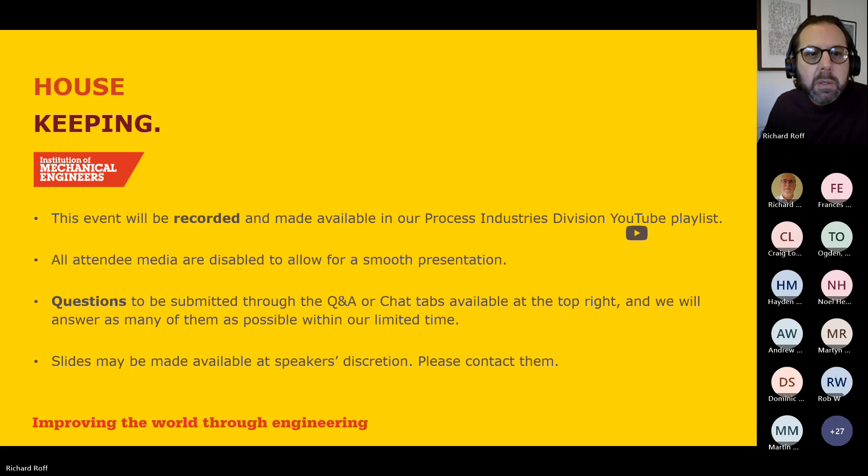About this session, about this webinar, this is the final event in a series of webinars that we'd called Steal with Pride, which isn't terribly snappy, but does seem to describe what we've been talking about. We hope today to provide a little bit more information in terms of particular subjects, and those subjects are around human factors, human reliability, and ethics, and also to summarize the sessions we've had so far.

So the agenda for today, this morning and into the early afternoon: I'm going to look back first over the Steal with Pride series of webinars that we've been running since 2021. We'll then have a session from people with expertise in human reliability and safety critical settings, around some techniques to reduce human error in high significance activities, with some practical applications.

We then need your input, because we have some case studies to look at and some discussions to have around the ethics of decisions versus safety and environmental protection, with respect to how engineers make decisions.

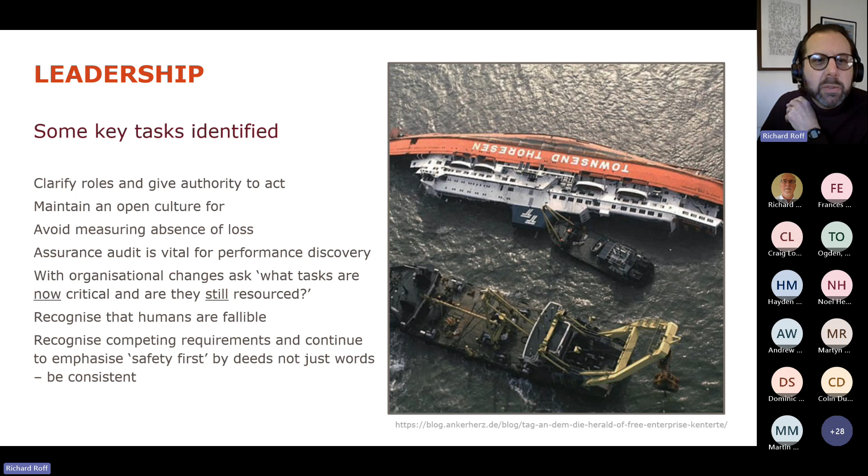Okay, so we need to define critical tasks, preferably what must go right, the barriers, what has to be in place within your procedures. And if we focus on what has to go right, we can then ask, do we have enough suitably qualified and experienced people to deliver that? And do we know that they know what has to go right?

Certain organizations have to manage a lot of change in organization and organizational content and makeup quite routinely, and most of their time then is spent reiterating, here's how we do things around here. If you work in a relatively consistent organization, you may not have to do that reiteration so much, but auditing can find out whether we're sliding away from where we want to be.

So we're trying to ask ourselves the question, do we understand what could go wrong? Do we know what systems we have in place to prevent that happening? And do we have information to assure us that that's happening? So you may recognize those questions.

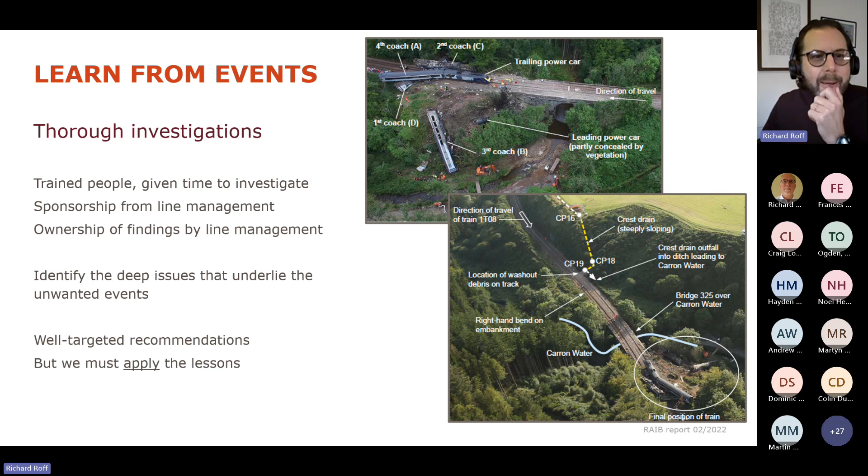When looking at data, we focused on a number of incidents. We focused on a number of aspects of data. So there's my three questions again: What can go wrong? What must go right? How will we know? But it is important that leaders see, discuss, and actually engage with information.

And that information needs to focus on the barriers. So what are we doing to make sure that incidents don't occur? It can give advance warning of degradation in barriers. Potentially, if we're measuring a leading indicator about the state of a barrier, if we know that it's beginning to degrade, we can fix it before there's actually any kind of loss or harm.

The other feature that looking at data can do, especially if you look at a suite of indicators, is allow for weak signals to be identified. Weak signals in those data might mean a particular part of the organization suffering a number of dips at once, or a particular subject suffering a number of dips across the whole organization. And these things can allow a strong response before even minor incidents occur.

But try to pick leading indicators, indicators that tell you something about barrier performance, which will give you and your management teams opportunity and time to respond. There is an important point that data can be difficult to engage with, particularly for people who are short of time. So it may well be that we need specialists to interpret that data, but it is the organization's data, not the specialist's data. It's kind of important that the data become information, and that the information is then used to make good decisions by management teams.

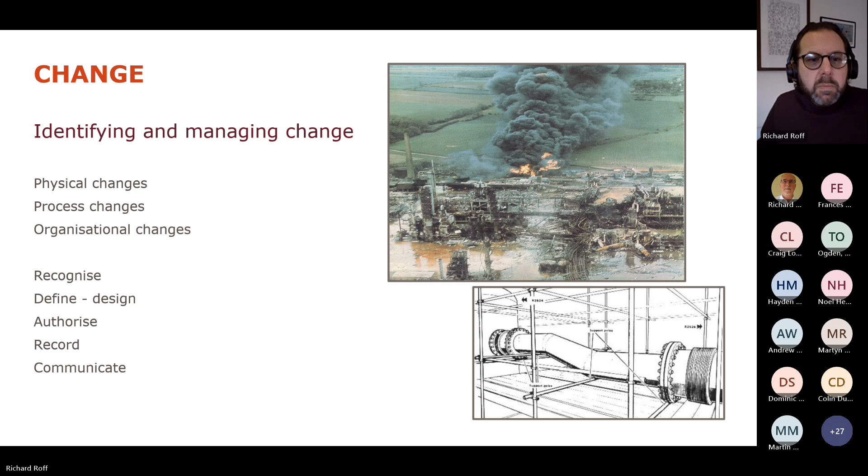Okay, well, one of the other presenters today, who you'll speak to in a moment, focused me back towards Trevor Kletz, and Trevor Kletz is a process safety guru, certainly from the chemical industry, and often people choose quotes from some of the things that Trevor has said, reputed to say, often said.

One of the ones I particularly like is one that I do use with managers in the organizations I work with. So after an accident, managers will often say, I did not know this was happening. If I had known, I would have stopped it. And Trevor then usually says, it's bad management. It's the manager's job to know what's going on. And he says it with total amazement. And actually, I think he's right. And I agree with this one.

And it's particularly important for you if you are advising or working with managers. If managers say, well, I don't know what's going on, then there may be something about prioritizing their time that we might be able to help with. I think it's quite important that we don't set our managers and leaders up to have so much on that they can't possibly know what's happening. And when I talk about organizational change, that's one of the areas to think about.

I was involved in the production of our guidance on safety critical task analysis, and many of you might be familiar with that because it's become in some ways the de facto standard on safety critical task analysis, used in many parts of the world, from Brazil to Singapore, and everywhere in between. So let me just introduce myself and the Energy Institute. I've been with the Energy Institute for about 14 years now, and in that time I've managed the human factors committee, and all of the various guidance documents and other resources that we've produced. I'm not going to talk about all of those today. I'm going to talk about one of those, and that's around safety critical task analysis.

Let me just get the slide going. There we go. So just very briefly about the Energy Institute. If you're not aware, the Energy Institute is a professional membership body for the energy sector. So unlike IMechE, who are there to support mechanical engineers, we're here to support anyone really who's working in the energy sector, regardless of what their role is. Whether you're an accountant, could be an engineer, could be a petrochemical engineer, could be an energy manager, etc. The Energy Institute is the home for those types of people.

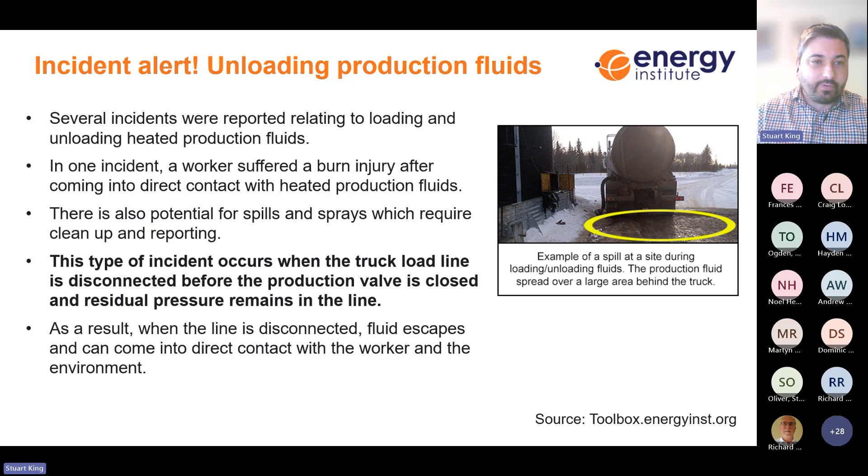But I don't think you can do that because there are safeguards. In this case, there aren't, and of course that means that when the line is disconnected, fluid escapes, and because it's heated fluid, it can come in direct contact with the worker, causing burns.

And the thing that can release that hazard from the tank is a task, or in this case, a business need, we could call it. So we have a need to load and unload production fluids to and from the tank.

Now, to manage that task, we have various steps. So we break that task down into, let's say, 5 steps in this case. We could visualize some of those as barriers. They might not all be barriers, but we could visualize them as barriers and complete our Swiss cheese model. And if all those steps are done correctly, the incident shouldn't happen. Very straightforward.

Now, we've documented that step-by-step process in a procedure. We've trained the workers to follow that process, that procedure, and we think, okay, great, job done. That's all that needs to happen.

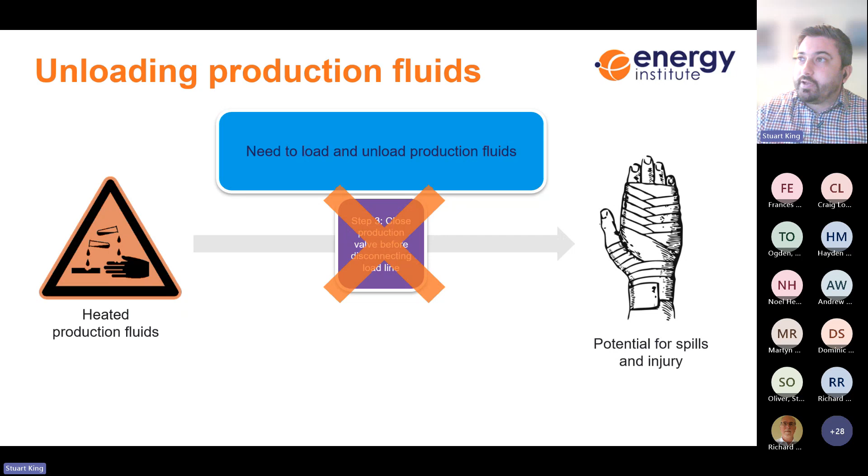And we know from experience, from the incident alert, that when that doesn't happen, the incident happens. The product spills, someone gets injured, someone gets burnt, or product leaks all over the floor.

Congratulations, you've just discovered a safety critical task. So what is a safety critical task?

A safety critical task is a task where human factors could cause or contribute to a major incident. It could also refer to a task where human factors could disrupt the mitigation of that incident. And so safety critical tasks can be operational tasks, emergency response tasks, control and mitigation tasks—it could be various different types of tasks.

The important thing is that a safety critical task is not just a task where someone can get hurt. And I know in the US this has caused some issues, or at least quite a long time ago when I was talking to people there. In many companies there's this consideration: oh, safety critical task, that's any task where someone can get hurt or injured—climbing up a ladder, anything like that. No, that's not it. Unless that person climbing up the ladder is holding the roof up or something, it's not a safety critical task.

So a safety critical task is where a human action can cause a major incident. That is what it is. It's not just where someone can get hurt, and that's why I think this diagram on the right is quite useful to visualize that.

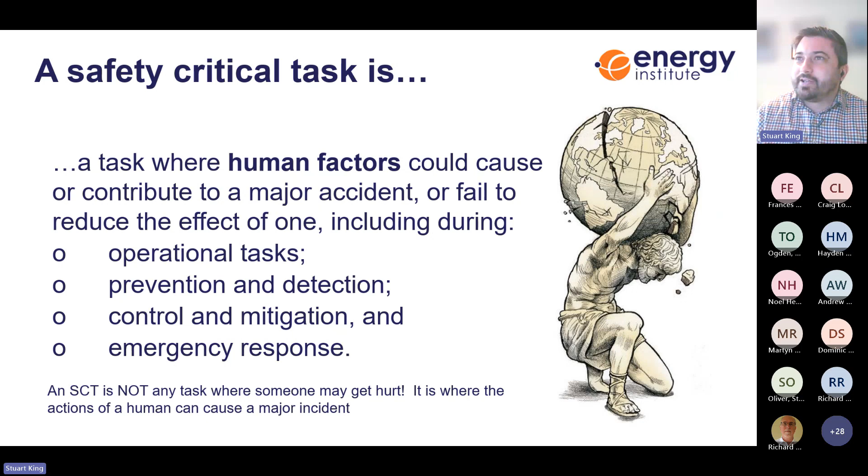So safety critical task analysis then is a qualitative assessment of a safety critical task. It's not a quantitative assessment. So if you do LOPA studies and things like that, we're not trying to give a probability of something going wrong. It's qualitative.

So what this really means is that it's all about breaking down a task. So we take a task that we think is safety critical, we break it down into subtasks or steps—it's the same thing. And then we want to understand, well, each of those steps, what human errors can occur? What would the consequences be of that human error? And what are the error traps that make that human error more likely?

So error traps is a term that some people like, some people don't. Others would call it performance influencing factors and things like that. But I think error traps kind of gets the point across quite nicely.

And of course, the whole point of safety critical task analysis is to recommend changes to remove the error or to reduce the error likelihood by removing the error traps, making the task inherently safer, and ultimately we want to reduce risk to as low as reasonably practical.

And importantly, safety critical task analysis is quite a major undertaking. There are simpler types of human factors analysis that can be done, which I will mention at the end, but safety critical task analysis is really equivalent to a HAZOP, so it's quite an undertaking, and therefore it only really needs to be done for the most serious process safety risks.

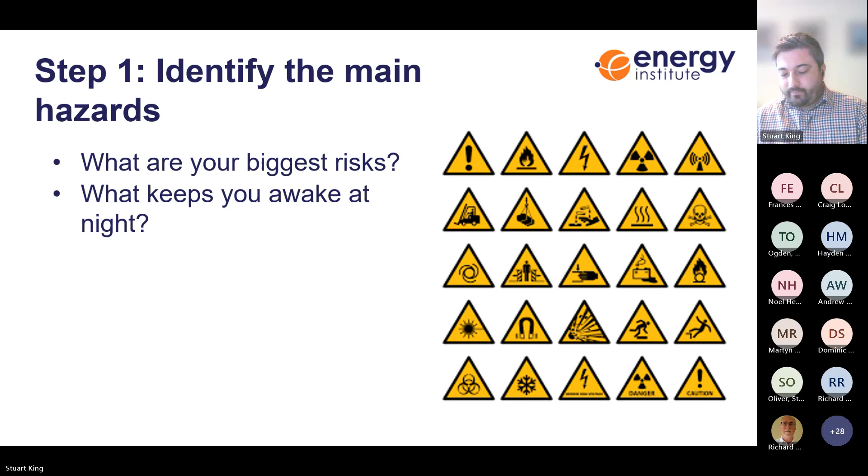Then step 2 is around prioritizing the safety critical tasks that you want to analyze. This is probably the main stage where companies struggle. A typical large site might have thousands and thousands of tasks that are undertaken, and not all of them need to have an SCTA done on them. So companies struggle to understand, well, which ones do I need to analyze, and which ones don't I need to analyze? That's usually the first major step that needs to take place.

There's a few ways that companies can prioritize the tasks they need to look at. Ultimately, they want to concentrate on only the most safety critical tasks. So how do we find that out?

Well, often it could be the subject of incidents in the past. So if you've got incident reports, it's quite possible that there may have been some example tasks in there that could be considered safety critical. That's one way of doing it.

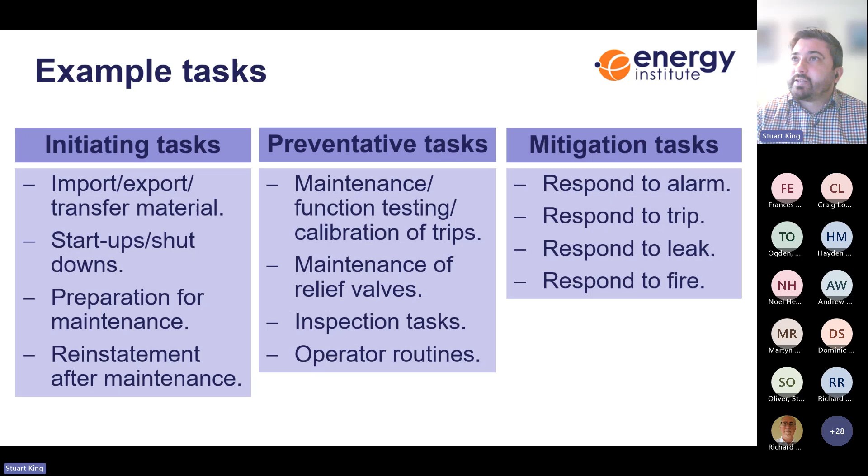Now, once you've prioritized your tasks, you have to pick one. You don't analyze them all at the same time, you analyze them one at a time. So we focus on one of the identified safety critical tasks, and now we really need to understand how the task is done.

To do this, we don't just look at the procedure, because the procedure tells us how work as imagined is done - it's how we imagine the job to be done. What we actually need to do is talk to the operators, carry out a talkthrough, as well as looking at the procedure, in order to understand really how the work is actually done.

Step 4 then is around describing the critical subtasks in that task. It's worth saying that a task, in this case, is a fairly high level description of a whole series of activities that need to go on. So, for example, if you've got a procedure on carrying something out, the procedure is probably the task, and the different steps in the procedure would be considered the subtasks.

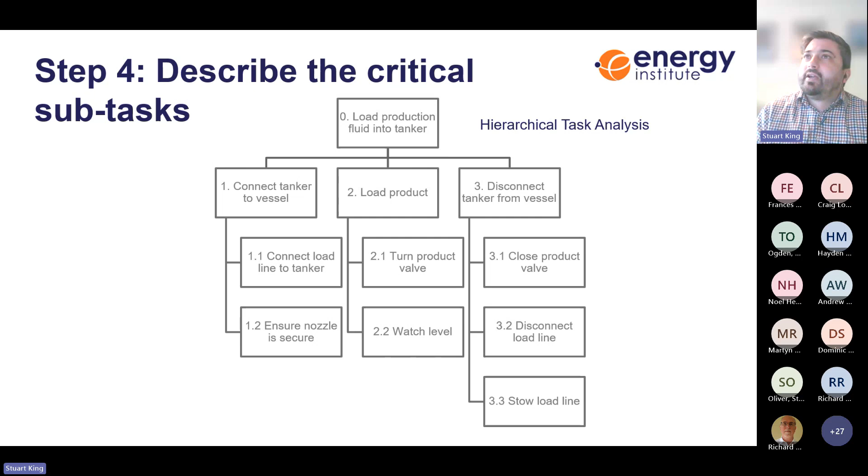Okay, so once we're happy that we've got a fairly accurate and useful picture of the task, step 5 is all about identifying what can go wrong and what could make it go wrong. So we're identifying potential errors and error traps, or performance influencing factors, PIFs for short.

So if we take a look at subtask 3, disconnect the tanker from the vessel, that's a subtask that we know has gone wrong in the past, because we've got the incident alert to prove that. So we look at this. Whilst we would obviously look at all of these tasks, just for illustrative purposes, we're going to look at step 3 here, disconnect the tanker from the vessel.

You can see that we've got three subtasks there: close the product valve, disconnect the load line, and then stow the load line. So what errors could be made during this subtask? This isn't necessarily the only way to do it, but it's the main way that is used. For each of those steps, we can apply a series of keywords.

So it's just like doing a HAZOP in many ways. In fact, we often call it a human HAZOP. You can see there we've got action errors, checking errors, information retrieval errors, selection errors, etc. So different types of errors.

And then we can look at them one by one and say, well, could this operation be done? Could it take too long? Could it be done too quickly? Could the operation be mistimed? Can an operation be omitted? And you can see there that it doesn't only apply to actions.

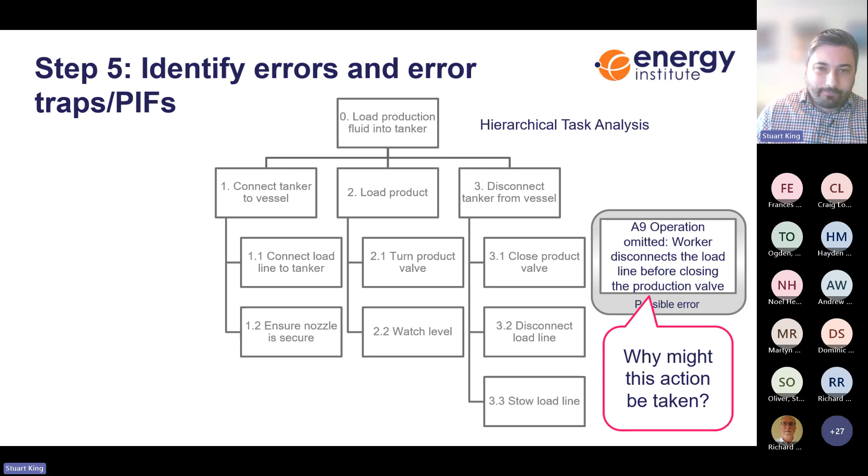Okay, so now that we've done that, we need to identify why this error might take place. In an ideal world, this sort of error shouldn't be possible, of course, but of course it is. So why is that likely?

So to do that, this is where we need to consider error traps, or performance influencing factors. When you look here, this is just a list of potential error traps. I don't believe this exists in the safety critical task guidance as such, but there are many different frameworks that can be used to consider different types of error traps. Often a good way of doing it is to break things down into error traps to do with the job, the person, the organization, or sometimes the task as well.

So if we look at this, what might make this particular error more likely? For example, if it's a very routine job, which I suspect in this case it probably is, those sorts of tasks tend to be done without thinking. Operators just do them. It's a bit like driving a car. We are fallible, and in those routine tasks we sometimes do things in the wrong order, miss things out. So that could be a potential error trap, because this is highly routine.

Time available or time required. If there are time pressures on the operators, which again I suspect there are, perhaps there are bonuses for doing all the deliveries to time, or maybe there are other time pressures as well. That can of course make people either rush, take shortcuts deliberately, or make mistakes.

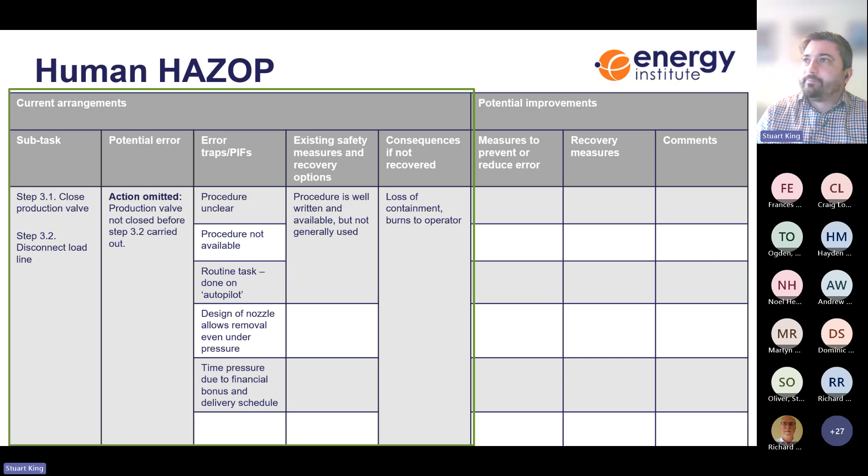Now, step 6 then is, so once we've identified all the different errors and error traps, we need to think, well, what are we going to do about that? What can we improve? So on the right hand side, we have the potential improvements. We have ways to reduce the errors, or remove the error traps, or reduce the errors. We have additional recovery measures that we could put in place. And what we probably should do is, for every task and every type of error that we identify, consider using some sort of hierarchy of risk management in order to try to address each of those. As I said, it's just done very systematically.

Remove - can the hazard be removed? Automate - can the human contribution be removed by automating the system? Mitigation - can the consequences of human failure be prevented? Bar is essentially, can the human performance be assured by mechanical or electrical means.

So in this case, for example, if it was impossible to remove the nozzle from the truck or from the tanker whilst it was under pressure, then of course that would probably solve the incident - barring...

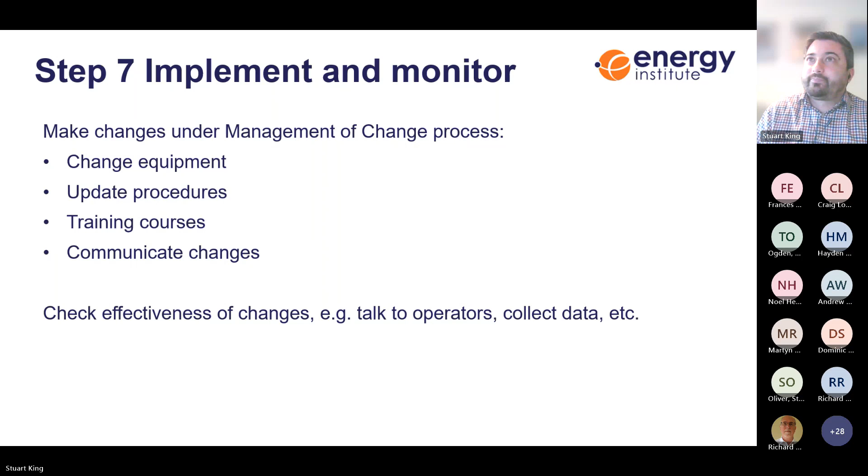It typically takes 1 to 3 days to analyze a single task, so these things tend to be done in big batches lasting a few weeks or longer at a time. And it takes about 5 days to be trained up in the methodology, effectively. So it is a major undertaking, and of course it's for the most major accident hazards.

It's one of those things that is worth doing and worth doing well, but it does take a long time. However, the principle of understanding what errors can be made, understanding what traps exist, and trying to do something about those error traps can actually be integrated into other types of risk assessment much further down the line, much closer to the front line.

And that's actually the focus of a current project that we're developing in the Energy Institute at the moment. But the general process of identifying error traps can be integrated right at the front line if you want - carrying out a 10-minute observation of the workplace to see what error traps are present, or integrating it into job safety analysis or the permit to work process as well.

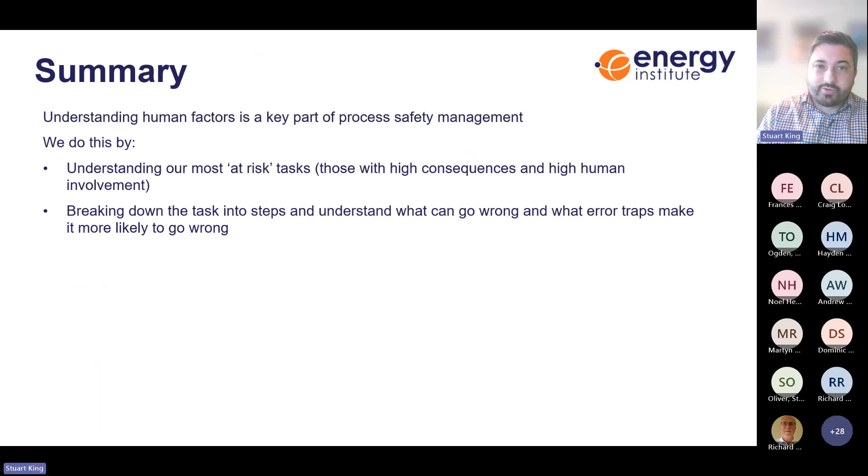So, in summary, understanding human factors is a key part of process safety management. One way to do this is understanding our most at-risk tasks, which in this case are those with high consequences and high human factors involvement.

We break down the task into steps to understand what can go wrong, and what error traps will make it more likely to go wrong. We implement changes to the task or the work environment to either remove the hazard, remove the human, support human performance by removing the error traps, or reduce the consequences to make recovery easier.

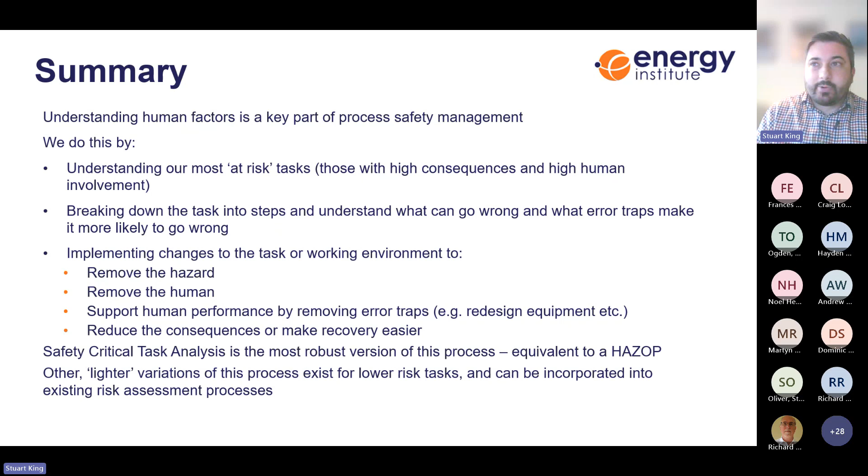As I said, safety critical task analysis is probably the most robust way to do this, but it is a major undertaking, and there are lighter ways to do it as well for less critical tasks.

What's the benefit for COMAH sites in the UK? Carrying out safety critical task analysis meets the HSE's expectations.

But more broadly than that, there should be a reduction in risk, avoidance of major incidents, and we're talking about company-ending incidents, as well as obviously life-ending incidents and major damage to equipment. These are potentially ruinous to an organisation.

Okay, so that's me. Richard, I've got your slides. Do we still have time for you? I realise I went a bit over time there. That's fine, thanks Stuart. I'll actually share my screen if you don't mind. Yeah, no problem, because I've made a couple of tweaks.

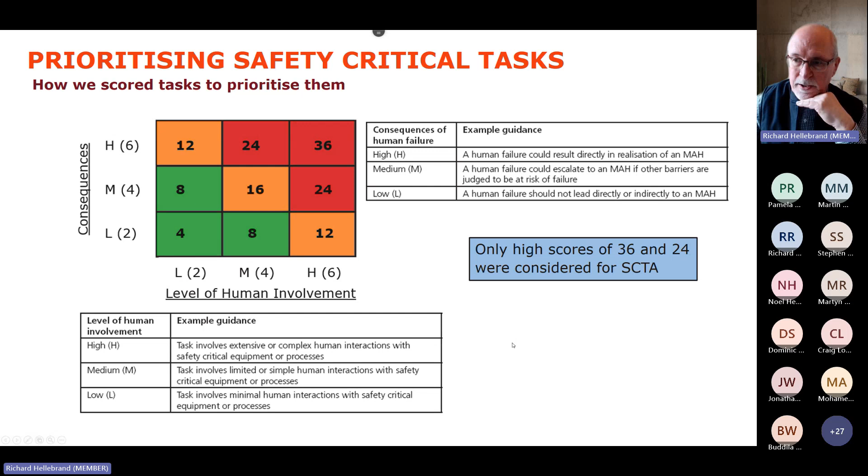275 tasks were checked, scored by the operators, not by the managers. So we got one or two good, experienced operators and technicians, sat them down and said, well, what jobs do you do? Not just the ones written down in our operating manuals, because that's what we envision being done, but what's actually done. Just tell us the title, even if you haven't got a procedure for it - what do you do?

So we listed them all, and they scored the amount of human involvement and the potential. Just to give a bit of a clue on this, VCM is vinyl chloride monomer, very, very flammable - it's a bit like LPG, but it's also a carcinogen, so you'll see it throughout.

I'm not going through all of these here, but I thought it's interesting, because we might have a diverse audience, to pick up on one thing that's perhaps common across all industries - responding to alarms. So it's not opening and shutting valves or disconnecting something, it's just responding to alarms. I'm going to pick up the SCTA just on this one example.

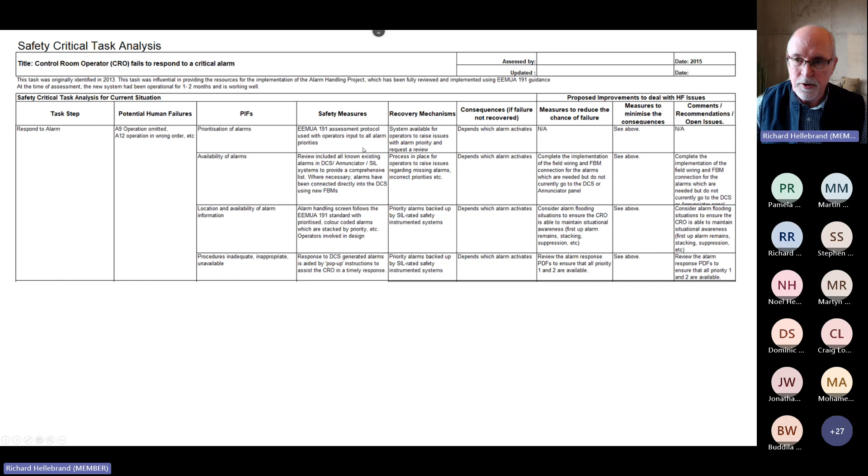So it's important to prioritize the alarms, and you have this thing called EEMUA 191. It's sort of fairly common in Britain. If you haven't got it, you should get it. There are also American codes that do the similar thing. It gives excellent advice how to do that prioritization, and lots of other things to do with it as well.

And then the availability of alarms. Well, what we did is we took all, not just alarms, but messages that came up in the DCS, fire alarm, pumps on a different panel, all these things, put them in one place so that we can have a consistent availability. Again, that involved field wiring and various other things that needed to be completed.

Location and availability of alarm information. So we had an alarm handling screen following EEMUA 191 codes with color coded and prioritized, etc. I'm not going to go through all of this.

And then with the alarms, for the priority alarms, if you click to acknowledge an alarm, it popped up with a PDF of what to do. So you didn't have to rely on memory and training when you're panicking. There's a PDF with all the priority alarms attached, so they immediately have the response.

So we needed to complete that. And then...

Moving on to the sort of more about the PIFs, the performance influencing factors. There's 2 pages of this. Ability to manage the workload presented by the alarm system. So again, about the interface, control room operators trained in the key responses and what to do, safety instrumented systems backed up, blah, blah, blah, blah. Alarm flooding, I talked about that, so we'd rationalised that already.

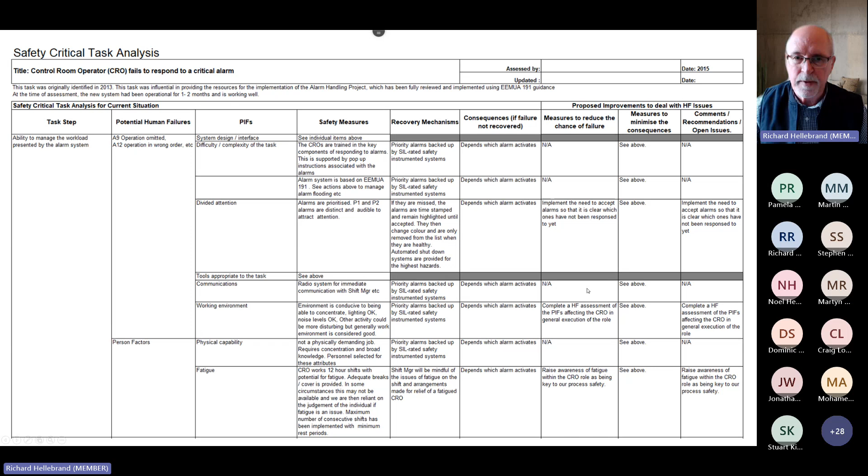And then you carry on with the person factors, stress, morale, is that an issue? Because it does affect things. It has a huge effect. If someone's bringing to work the stress or the problems they've got at home, that can be a problem.

So we need to keep on top of that. Not that we can do much about it other than keep on top. And the second, workload overload, of course we can - that's down to management, Richard's already mentioned that. Organisational change can be a problem. And then competence - competence is vital. Good onboarding and keeping people up to date with what they need to know.

And also staffing levels as a work factor. In this particular plant, we operated with a single operator on the panel, but breaks were covered by someone else who's quite capable of running it, and they did a handover, making sure that the alarms and the radios work when they're away. That was fine. So that's just one example of that task of responding to an alarm.

There's a few links here from the COMAH Competent Authority. Two of the links that Stuart's already mentioned about some training, but they aren't the only providers. Risktec, who are part of TUV, used to be part of ABB - they are pretty hot on this, they've got training courses. Human Reliability Academy, they've got training courses too.

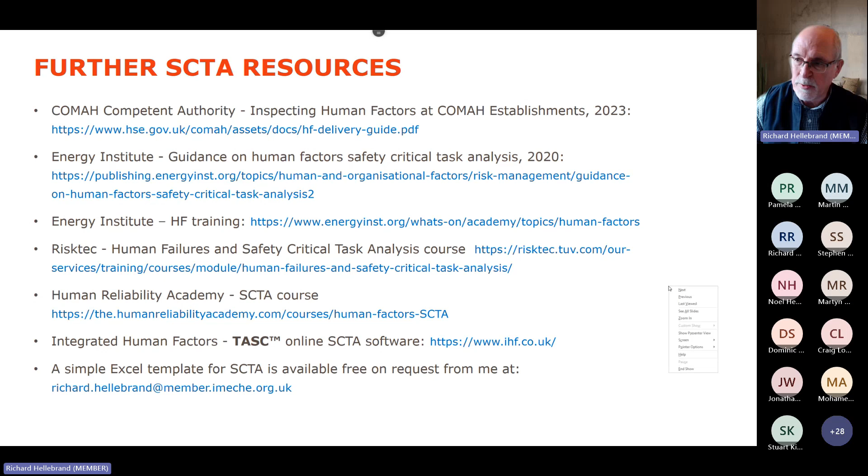You can get special software if you want it, have to pay for it of course. And also, if anybody actually wants it, it's a freebie from me, just email me.

I've used my own spreadsheet which is really aimed at the operators. You've got, in really easy speak, the tasks on the front. Then you split your task down to subtasks or steps, and then stick them in, and then select from your drop-down lists. So it's actually pretty, in my opinion, pretty straightforward, and you can do it fairly quickly.

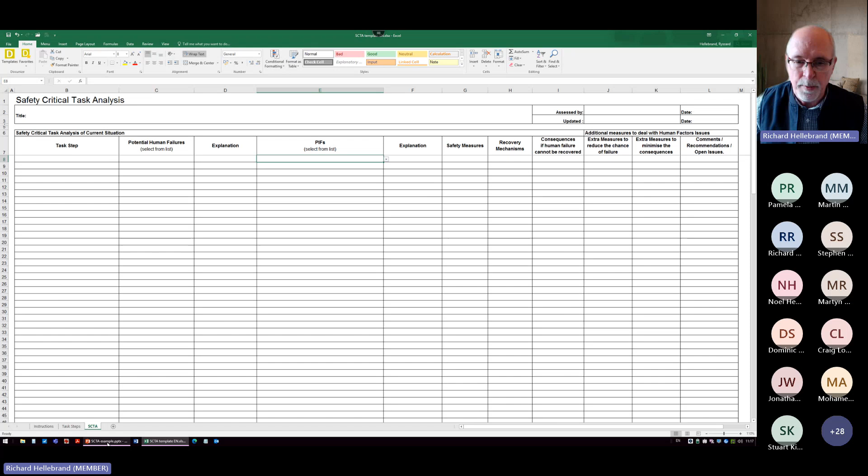I think the important thing is this area, when you need to start grouping some things together. So loading and unloading road tankers or rail cars, you can group them together, because you should have the same level of checks and balances really on those things.

And things like the 4 eyes principle is the classic. If you get someone, say, when you've done it, you have to get someone else to countersign the form to say you've done it - people pay attention. So sometimes 4 eyes is very useful, because it just gives you a bit more of a layer of protection.

So really that's it from me. As I say, I will pop these resources up just on the screen for a minute while I'm finishing off that talk. It can be a really simple technique.

If you've done HAZOP or any other FMEA or any other risk assessment, it's basically the same stuff. But the really good thing about this is if you ask about human error and failure, people get their backs up and go defensive. This is completely dispassionate, and if you get the operators to lead it, they will volunteer stuff that can go wrong. If you lead it, not so much. So it's really important to involve the team, and they will run it for you once you get going.

That's it, just one example. I'm done. Great stuff.

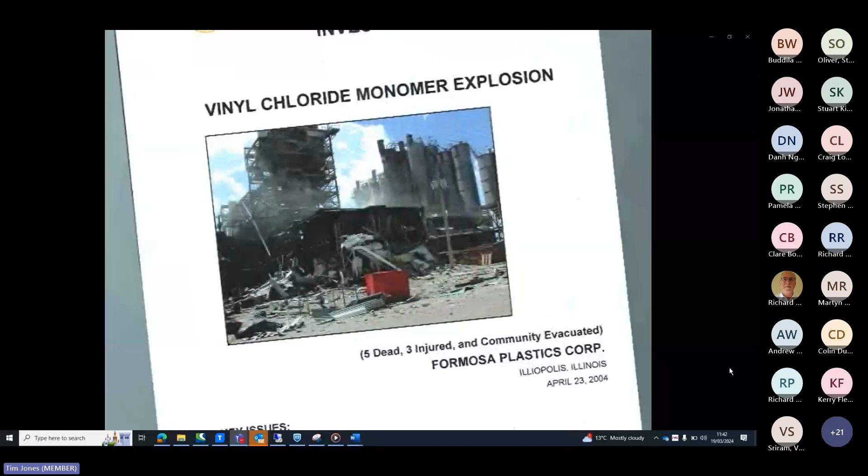This explosion occurred after a worker opened a valve on a pressurized reactor full of flammable material. It might be tempting to simply blame the tragedy on human error. However, as is often the case, the root causes were much deeper. The CSB investigation revealed that better operating practices and equipment design could have reduced the chances of human error that had such catastrophic consequences. The CSB used physical evidence, documents, and the testimony of the few surviving witnesses to reconstruct the accident. The following computer simulation shows how events likely unfolded.

The Formosa plant made polyvinyl chloride, or PVC, in 24 large vessels called reactors that were arranged in groups of 4. Inside each vessel, thousands of pounds of highly flammable, toxic vinyl chloride reacted under heat and pressure to form PVC. An operator controlled the process from a panel on the upper level. When the process was finished, a second operator would walk down the stairs and open valves on the reactor piping to transfer the product out.

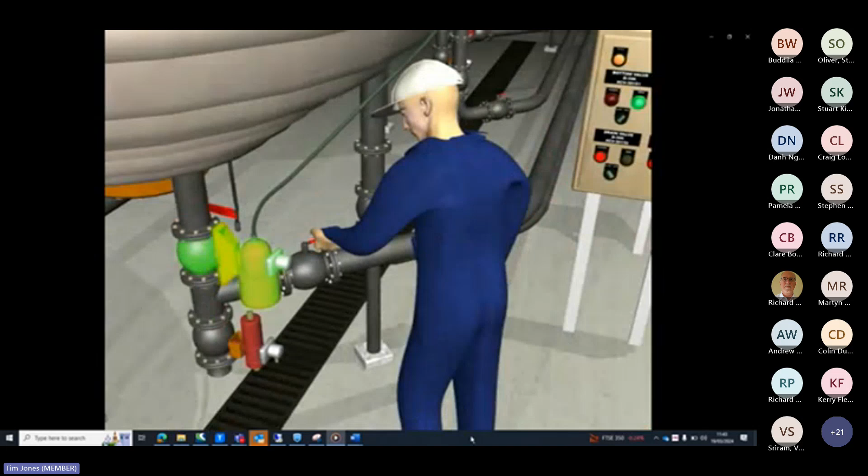After completing the transfer, a worker back on the top level would then clean out the inside of the reactor with a high-pressure water blaster. The worker would then go to the lower level and open the reactor bottom valve as well as the drain valve. Water emptied onto the floor into a drain.

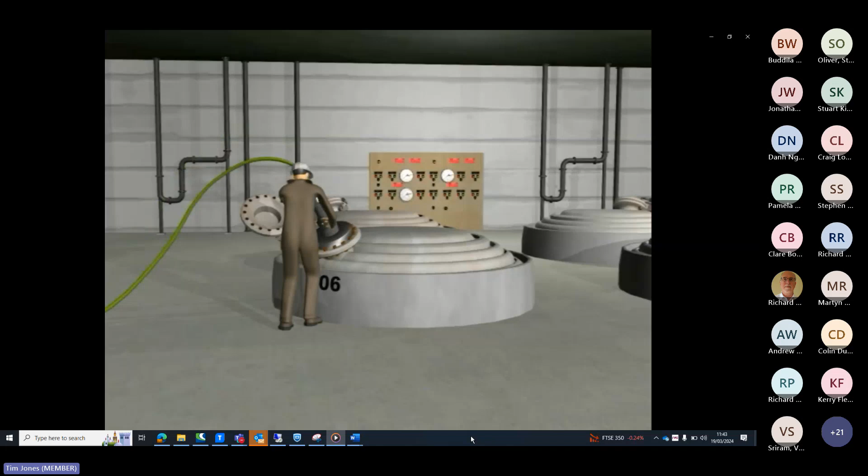On the evening of the accident, an operator started cleaning reactor 306 with the water blaster. He then walked downstairs to drain the water out of the reactor he had been cleaning, but he made a critical mistake. The CSB concluded that instead of turning left at the bottom of the stairs to get to reactor 306, the operator turned right to a different group of reactors and approached reactor 310.

But reactor 310 was not in the cleaning process. It was pressurized and heated in mid-cycle, making PVC. The operator turned switches to open the reactor bottom valve and the drain valve.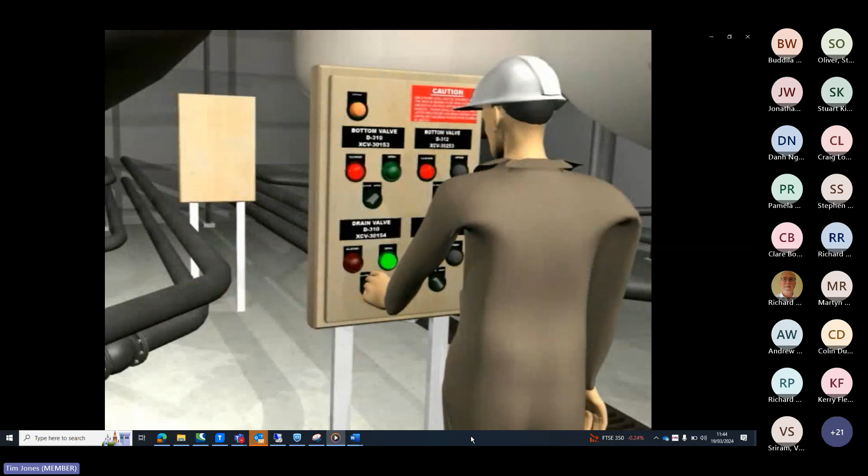The drain valve opened, but the reactor bottom valve remained shut. An interlock blocked the air supply to the valve's actuator. It was designed to do this as a safety measure when the reactor was under pressure, to prevent an accidental release. But instead of checking to see why this valve would not open, the operator decided to bypass the interlock. He disconnected the existing valve air supply hose and reached for one with a continuous air supply meant for use only in emergencies. He connected this hose to the valve.

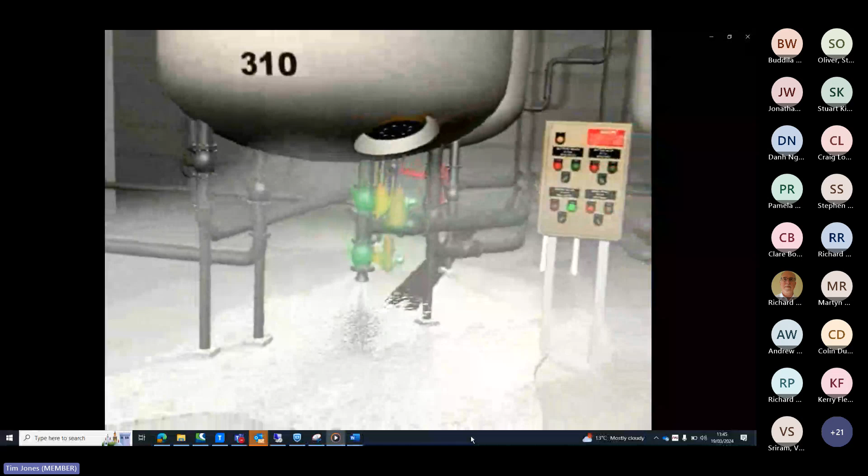It opened. Suddenly, the highly flammable vinyl chloride mixture began rushing out onto the floor, producing a loud rumbling noise that sounded to witnesses like a jet engine. Workers smelled vinyl chloride, and the vapors triggered an alarm. The shift supervisor rushed toward the reactors. There he saw reactor 310 spraying vinyl chloride onto the floor, where there was already a foaming mixture 1.5 feet deep.

Believing he could stop the release, the supervisor raced to the upper level and told operators to open valves, which would relieve pressure in the reactor. The supervisor and one operator then tried to get to the lower level through an interior stairwell, but were stopped by the overwhelming odor of the vinyl chloride vapor.

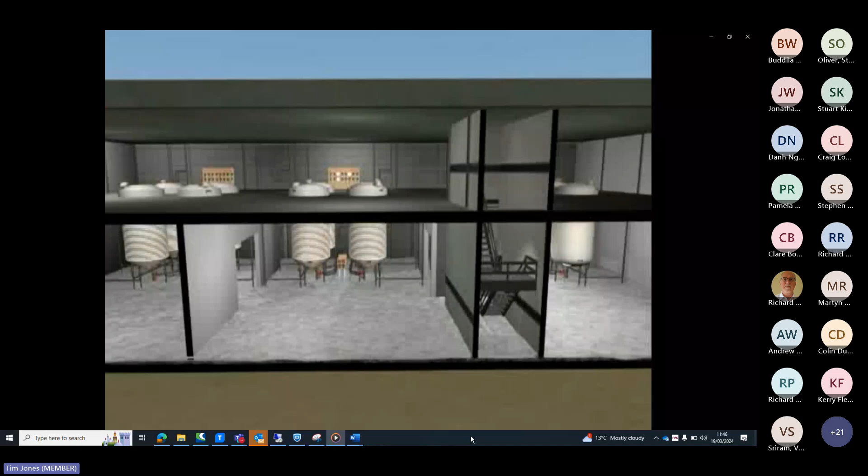The operator remained on the upper level. The supervisor headed down to the lower level on an exterior stairwell. Just then, the vinyl chloride ignited and exploded violently. Witnesses reported 3 or 4 additional explosions.

4 workers were killed immediately: the 2 operators who had been working at the top of the reactor, and 2 operators who had been on the lower level, including the one who had apparently opened the reactor bottom valve. A 5th operator, who was seriously burned, died 2 weeks later.

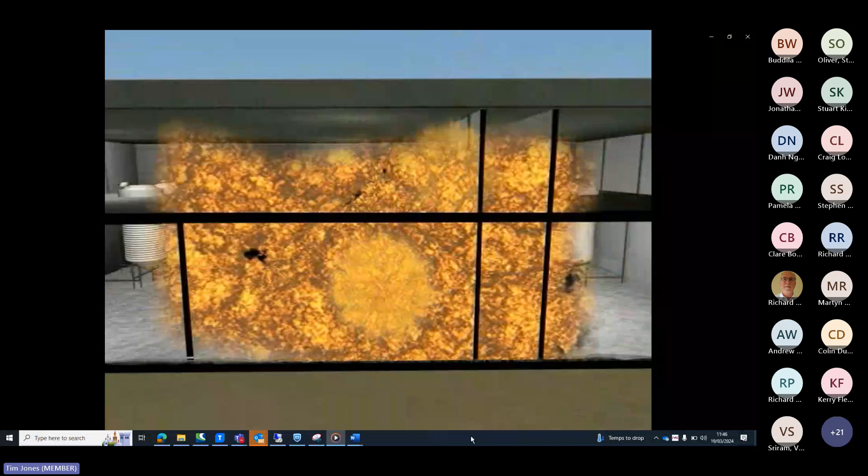2 other workers and the supervisor, who had been in the exterior stairwell, were seriously injured. The force of the explosions destroyed much of the plant, including the laboratory and the safety and engineering offices. It blew off the reactor building roof, knocked down walls, damaged metal frames and piping, and lifted the reinforced concrete floors on the upper levels of the plant.

The CSB investigation found that systems and procedures put in place by both Borden Chemical and Formosa were insufficient to minimize the potential for human error. Formosa did not adequately train and drill its employees to immediately evacuate in the case of a major release of hazardous chemicals. Such an evacuation would have saved lives.

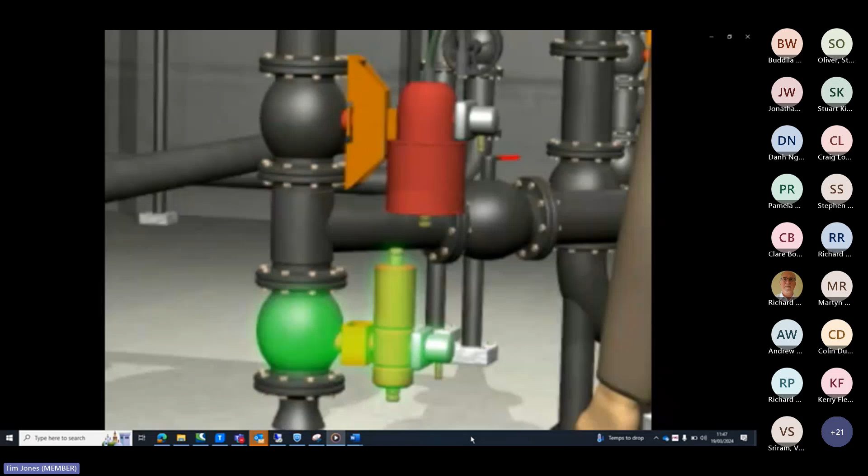One way to minimize human error, the CSB found, would have been to install additional locks or other devices to prevent critical valves from being opened when the reactor was under pressure. Overriding the only safety interlock was all too easy to do by simply attaching the emergency air hose that hung nearby. Although the reactors were clearly numbered, they were grouped into similar sets of 4, increasing the chance that an operator might go to the wrong reactor.

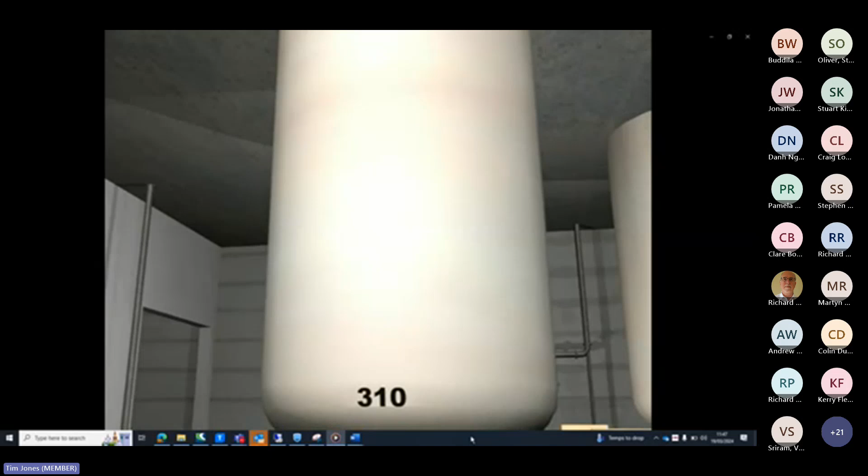There were no gauges, indicators, or warning lights to inform operators on the lower level that a reactor was processing vinyl chloride. And those operators did not carry radios or have an intercom, so they were unable to quickly check on the reactor status with operators at the controls upstairs.

In 1992, Borden Chemical, the previous owner of the Illiopolis plant, conducted a process hazard analysis which stated that the interlock on the reactor bottom valve was susceptible to misuse. Additional safeguards were recommended, but never adopted.

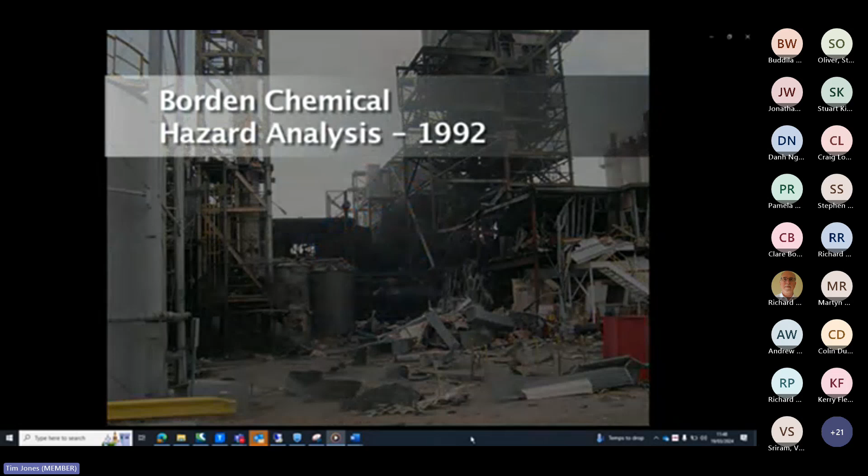Another hazard analysis in 1999 again identified severe consequences if someone opened the bottom valve on an operating reactor. But the analysis incorrectly concluded that the existing safety interlock was sufficient to prevent a serious incident.

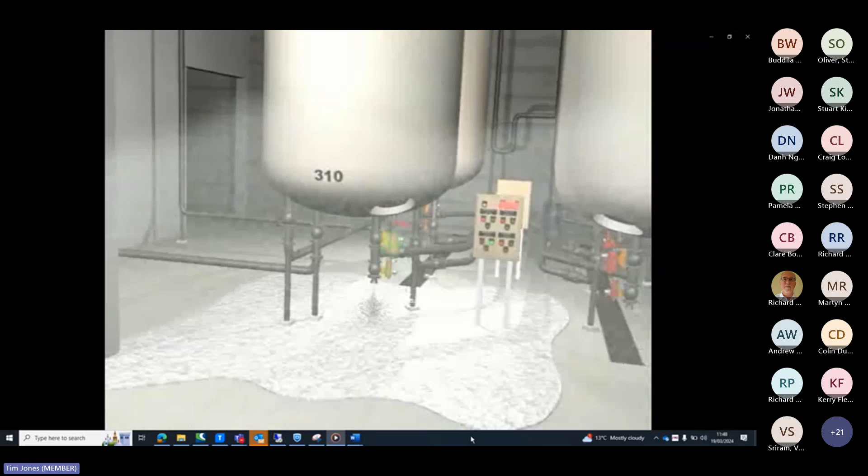Companies need to thoroughly investigate near-miss incidents to uncover any underlying trends or safety weaknesses. Formosa experienced several previous reactor incidents that, taken together, could have pointed to the potential for catastrophic consequences from human errors. In 2003, an operator at Formosa's Baton Rouge, Louisiana PVC plant opened the bottom valve on the wrong reactor, releasing 8,000 pounds of vinyl chloride to the atmosphere.

In February 2004, an operator at the Illiopolis plant bypassed a reactor bottom valve interlock, resulting in another significant atmospheric release of vinyl chloride. Formosa then recognized that additional controls were needed, but didn't act quickly enough to implement improvements. The explosion occurred 2 months later.

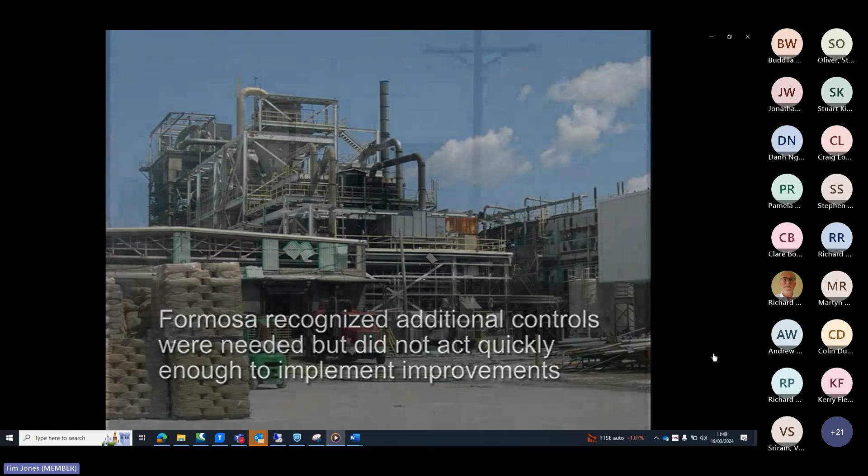When a large chemical release like this occurs, employees need to get out of harm's way as quickly as possible. Companies need to train and drill their employees to evacuate instinctively.

In this case, 2 operators remained on the upper level, trying in vain to slow the release. They and others who remained in the area died in the explosion. Their lives would have been saved had they evacuated immediately.

The CSB identified many ways that the companies involved could have avoided this tragedy. To prevent future accidents, the CSB made several safety recommendations to the company, the EPA, the leading industry association, and others. The CSB recommended that the Formosa Corporation review the design and operation of all its U.S. facilities.

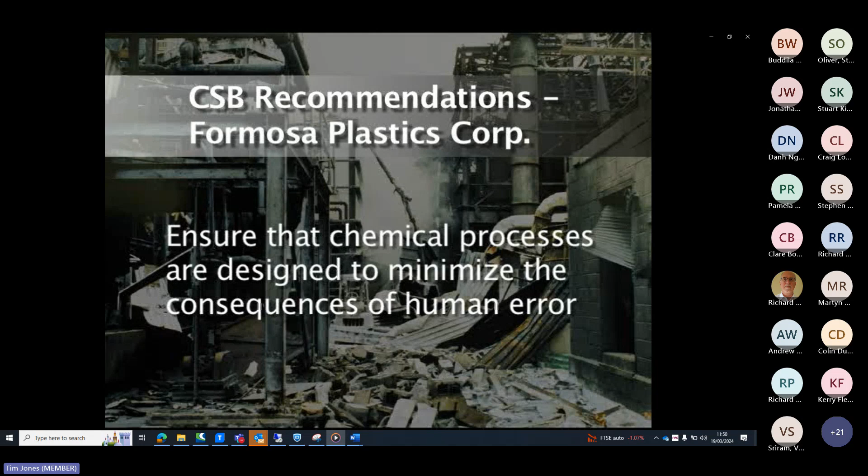The CSB urged Formosa to ensure that chemical processes are designed to minimize the consequences of human error, improve control of safety interlocks, more thoroughly evaluate high-risk hazards, consider all consequences in near-miss investigations, and improve emergency actions, including prompt evacuations with periodic drills.

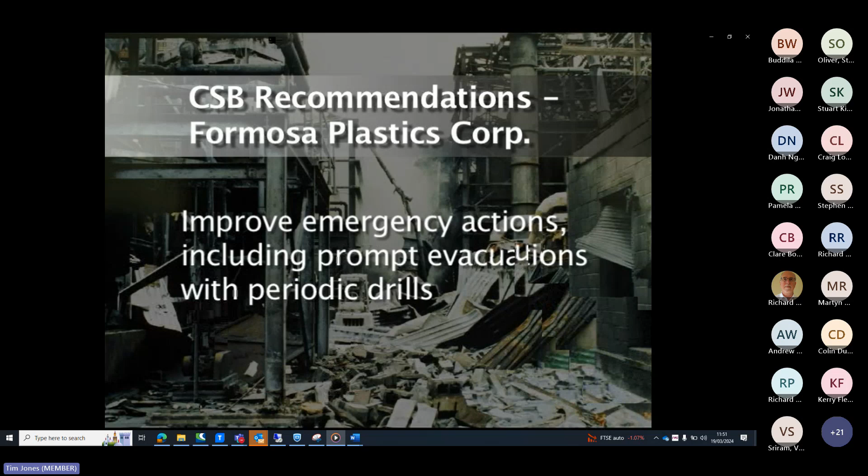This accident occurred because the companies involved did not look closely enough at the potential for catastrophic consequences resulting from human error. People do make mistakes, and that is why it's all the more important to design systems that take into account the possibility of such errors.

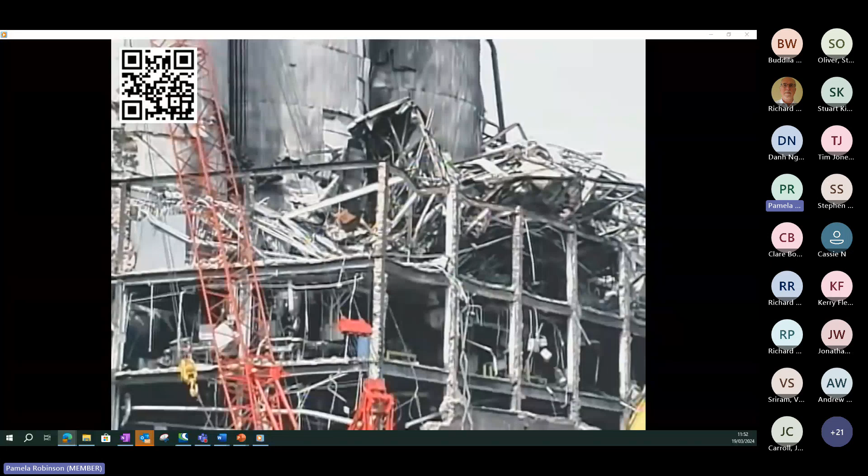At 7:15 p.m. on February 7th, 2008, a series of violent sugar dust explosions devastated the Imperial Sugar Refinery in Port Wentworth, Georgia, just outside Savannah. Explosions raced through the buildings, fueled by accumulations of combustible sugar dust and sugar that had spilled from equipment. Thick concrete floors heaved up, and brick walls were blown into stairwells and work areas, blocking many exit routes. Fires spread rapidly.

8 workers died at the scene. 6 more died later at a regional burn center. Dozens of others were injured. The plant's massive sugar packing buildings were a total loss.

The accident at Imperial Sugar was the deadliest industrial dust explosion in the United States in decades. It highlights the extremely serious nature of combustible dust hazards. There were significant accumulations of sugar dust and spilled granulated sugar on surfaces throughout this facility. Conditions were set for a catastrophic accident.

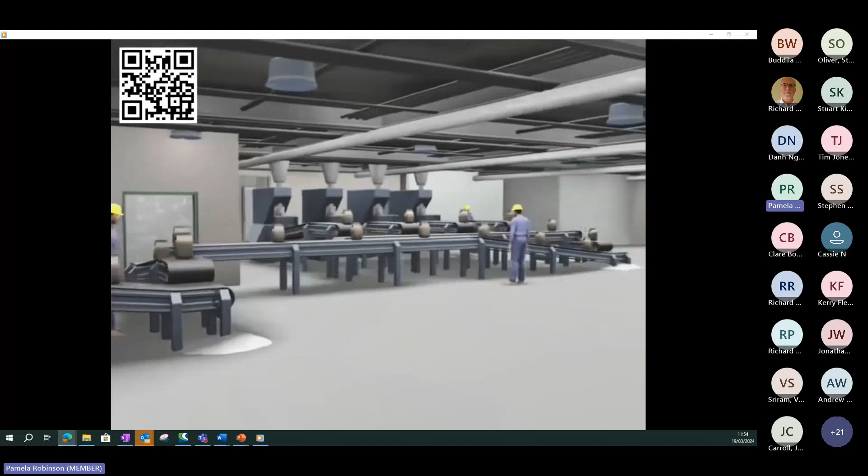Imperial Sugar's sprawling Port Wentworth complex began operations in 1917 and grew to become one of the largest sugar refining and packaging facilities in the U.S. Granulated sugar from the refinery was stored in 3 100-foot-tall silos and then conveyed into packing buildings where it was packaged for distribution. Granulated sugar was also converted into specialty products, such as brown sugar and powdered sugar. Sugar was transported by a complex system of bucket elevators, screw conveyors, and conveyor belts.

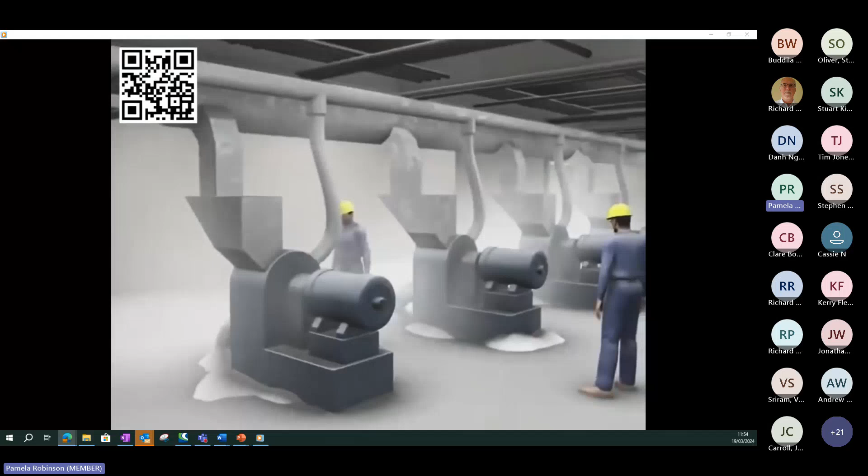During this process, sugar spilled onto floors throughout the work area. In places, the spilled sugar was many inches deep. This sugar also contained fine particles, which became airborne. In addition, hammer mills were used to crush the granulated sugar into powdered sugar, creating even more dust. The machines were connected to a dust collection system, but it was undersized and in disrepair. And it was not connected to the bucket elevators and conveyors.

Significant amounts of sugar dust escaped into the work areas. Workers routinely used compressed air to clean packaging machines, further dispersing sugar dust throughout the buildings. Over time, large amounts of dust accumulated on elevated, hard-to-clean surfaces, such as ducts, beams, and light fixtures. These surfaces were not cleaned often enough to always keep the dust below hazardous levels.

In the tunnel beneath the sugar silos, granulated sugar flowed through chutes onto a long steel conveyor belt. From time to time, clumps of sugar would become stuck in one of the chutes, blocking the flow of sugar on the belt, spilling sugar onto the floor and releasing dust into the tunnel. But the tunnel was large and ventilated, so this airborne dust did not build up to explosive concentrations.

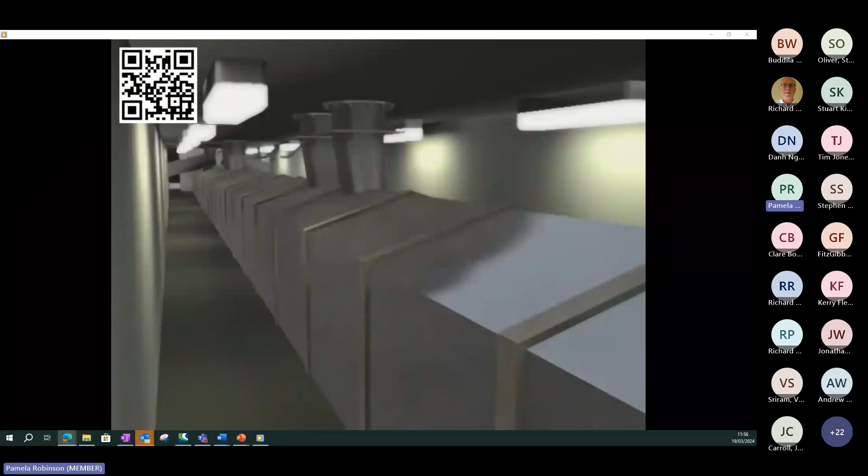However, in 2007, the company enclosed the conveyor belt with stainless steel panels to protect the sugar from possible contamination. The enclosure was not equipped with a dust collection system. As a consequence, sugar dust would now be trapped inside this enclosure.

On February 7, 2008, clumps of sugar were found blocking one of the discharge chutes. Sugar from the adjacent silo likely spilled off the moving belt. Dust likely accumulated to an explosive concentration inside the enclosure. At about 7:15 p.m., the sugar dust contacted a nearby ignition source, likely an overheated bearing, and exploded.

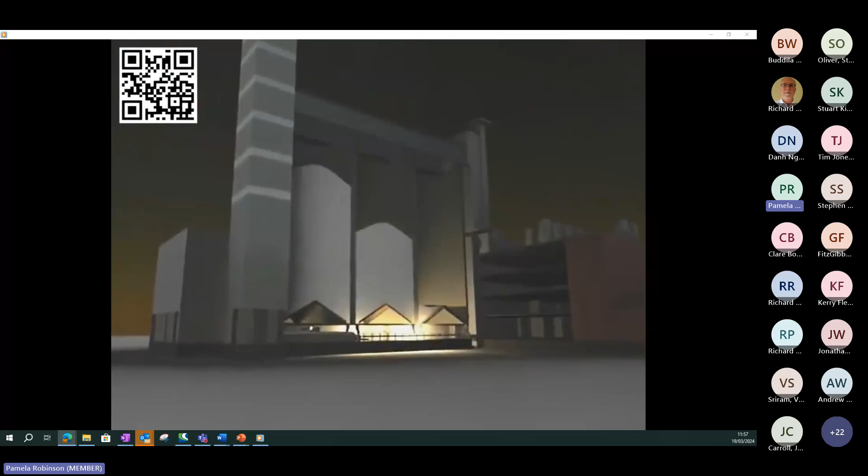This primary explosion blew apart the enclosure and vented into the packing building. Accumulated sugar was lofted and ignited by the advancing fireballs. The dust clouds fueled a chain reaction of secondary explosions, which swept through the buildings. Concrete floors buckled, releasing tons of granulated and powdered sugar into the flames.

Emergency evacuation drills had not been conducted, and the explosions had cut the power to much of the interior lighting. In the maze of darkened and damaged stairwells and passageways, workers desperately tried to flee the growing inferno.

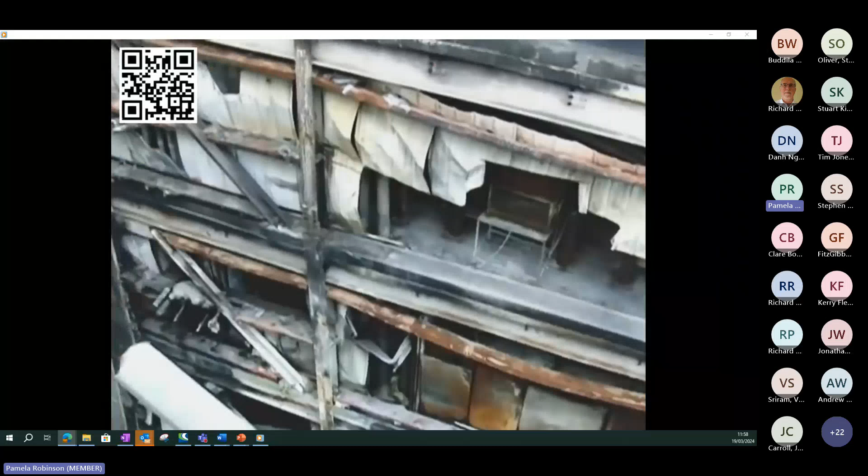The CSB found that correspondence dating back to the late 1960s showed that plant managers in Port Wentworth were aware of the explosive nature of sugar dust and the danger of dust accumulations. As far back as 1967, a memo described a sugar dust explosion that heavily damaged the powdered sugar mill room. Despite the long-standing awareness of the explosive nature of sugar dust, not enough was done to manage the hazard.

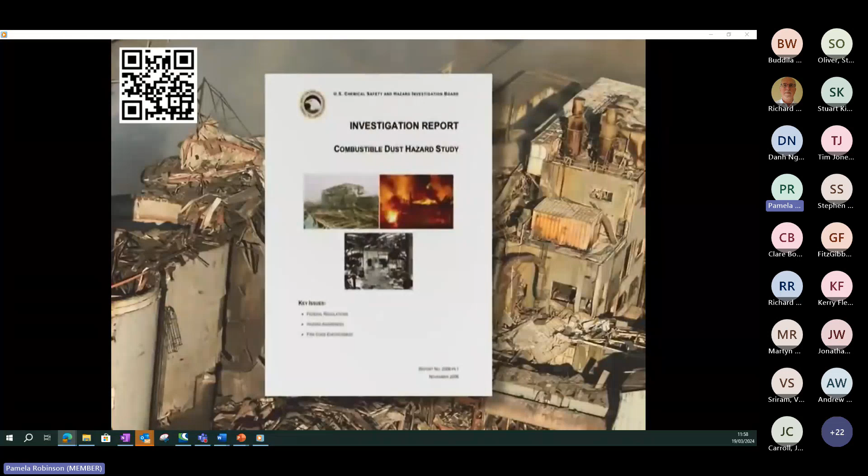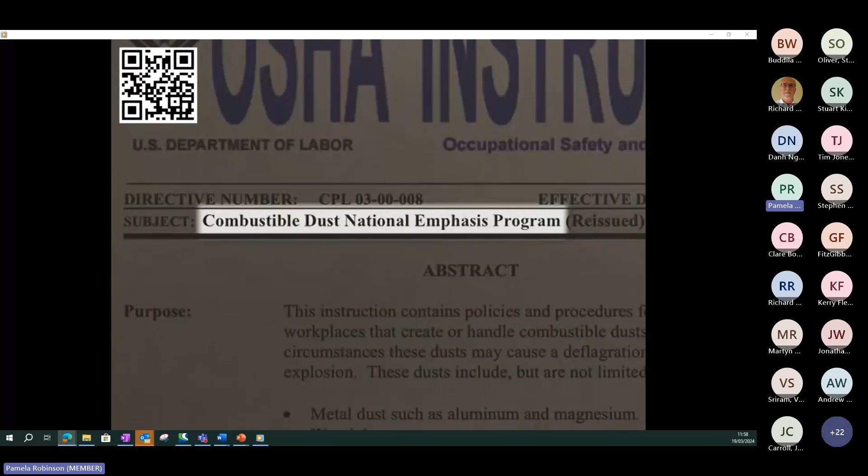In 2006, the CSB issued a study of combustible dust, which called on OSHA to establish a comprehensive combustible dust standard based on the current standards of the National Fire Protection Association, or NFPA. In October 2007, OSHA began implementing a new national emphasis program to increase the enforcement of existing regulations related to combustible dust. Imperial Sugar learned of the OSHA Combustible Dust National Emphasis Program 4 months before the devastating explosion at Port Wentworth. But management did not act effectively to control the serious dust problem in the packing buildings.

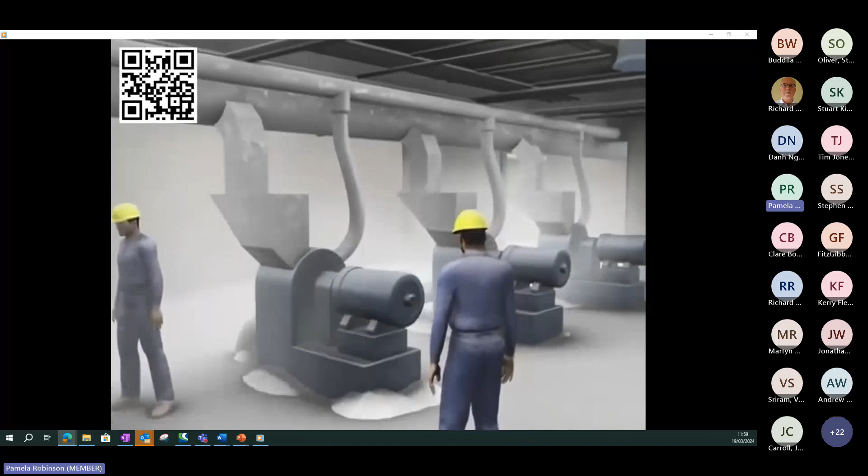Less than 2 months before the disaster, an internal inspection showed that many tons of sugar were still regularly spilling onto the floors. This provided much of the fuel for the massive secondary explosions and fires.

The CSB found that over the years, the Port Wentworth facility periodically experienced small fires fueled by spilled sugar and accumulated dust on equipment, but none resulted in a sugar dust explosion that propagated through the plant. Investigators said that decades of operating without a catastrophic explosion may have lulled managers into complacency.

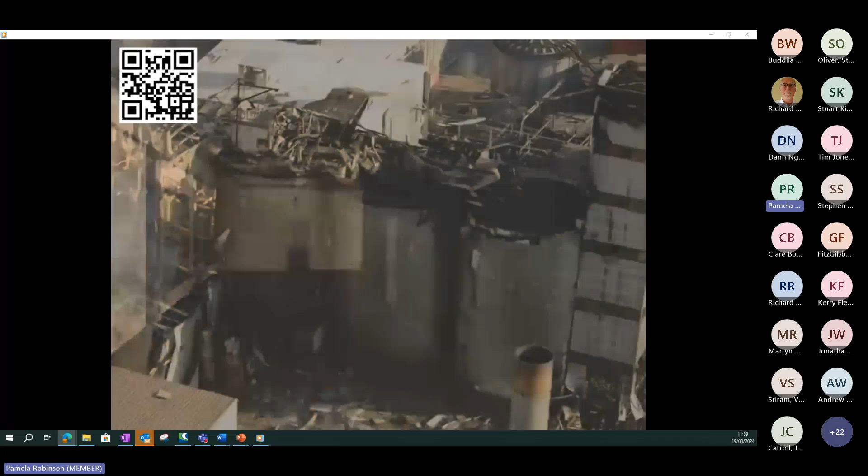In its report, the CSB issued the following recommendations to the Imperial Sugar Company: apply NFPA standards to the design and operation of the rebuilt Port Wentworth facility, develop and implement comprehensive combustible dust control, housekeeping, and training programs, and improve emergency evacuation policies and procedures.

Companies can go a long way to control combustible dust within their own facilities by following the existing recommendations of the National Fire Protection Association. But it is also time for a comprehensive federal standard on combustible dust.

In April 2009, OSHA announced plans to begin rulemaking on a combustible dust standard for general industry. In its final report on the Imperial Sugar accident, the CSB recommended that OSHA move forward expeditiously with the new standard. Without regulation, enforcement, and education, workers will continue to be at risk from catastrophic dust explosions.

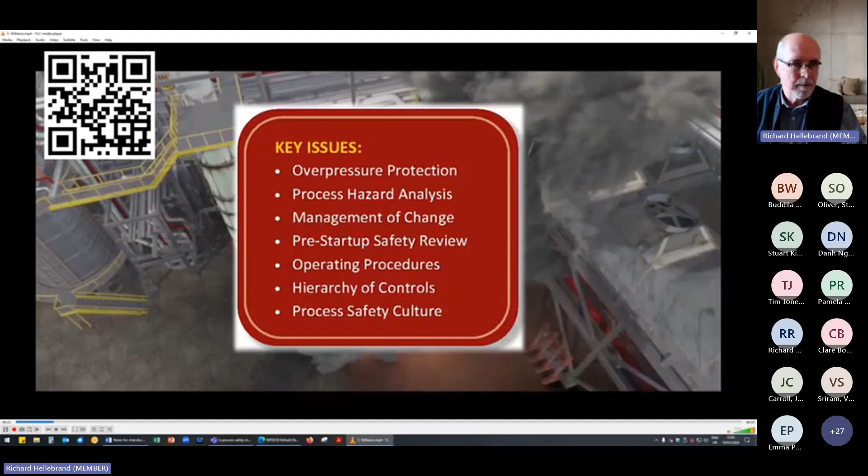In it, the agency describes a number of process safety management program deficiencies at Williams, which set the stage for the incident. In particular, the CSB found that the heat exchanger that failed was completely isolated from its pressure relief valve. When pressure inside the heat exchanger dangerously increased, there was nothing to stop a catastrophic rupture.

Our case study on the explosion at Williams describes an ineffective process safety management program at the plant at the time of the incident. We urge other companies to learn from our investigation, to incorporate our recommendations at their facilities, and to assess the current state of their process safety culture so that a similar accident can be averted.

The Williams Geismar Olefins plant is located in Geismar, Louisiana. The plant produces ethylene and propylene, chemicals used in the petrochemical industry to make a variety of products, including plastics and antifreeze.

Within the Williams process is a distillation column called the propylene fractionator. It separates a mixture of propane and propylene. Heat exchangers called reboilers supply heat to the fractionator to boil the propane and propylene mixture, which is essential to the separation process. The reboilers are shell and tube heat exchangers.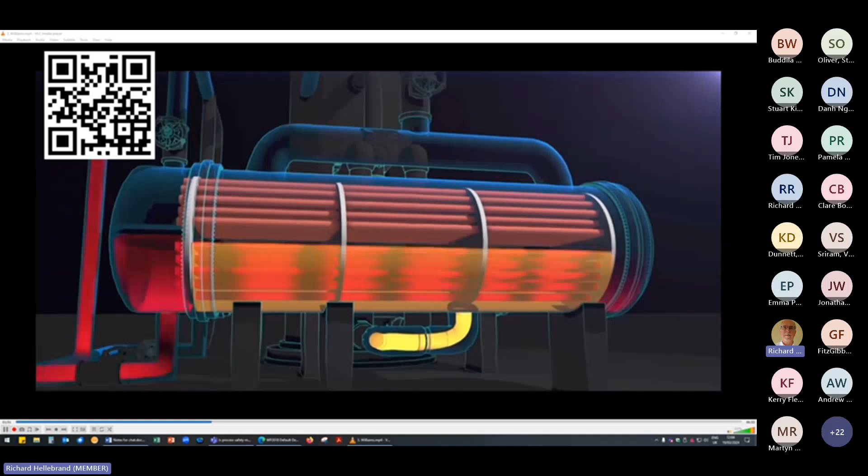Hot water flows through the tubes, heating and vaporizing propane that flows through the shell and back to the propylene fractionator. The water that flows through the tubes contains a small amount of oily tar, which condenses into the water earlier in the process. Over time, the oily tar from the water builds up on the walls of the reboiler tubes. This buildup is called fouling.

Fouling reduces the efficiency of the reboilers. Periodically, the reboilers must be shut down to clean the tubes. The original propylene fractionator design had both reboilers running simultaneously.

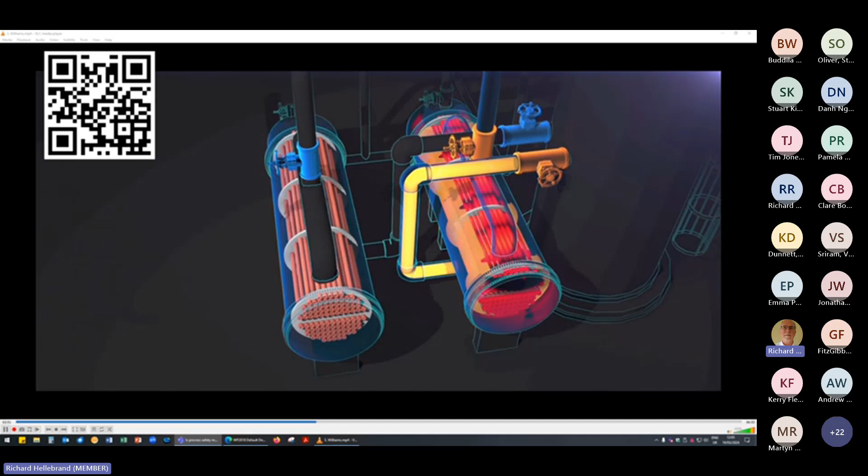But in that configuration, the fractionator had to be shut down when a reboiler fouled and needed cleaning. To prevent shutdown of the propylene fractionator each time the reboilers needed cleaning, in 2001 new valves were installed on each reboiler to allow operation of only one at a time. The other reboiler is on standby, clean and ready for use.

But unforeseen at the time, these valves introduced a serious hazard. They isolated the standby reboiler from its protective pressure relief valve, located on top of the fractionator.

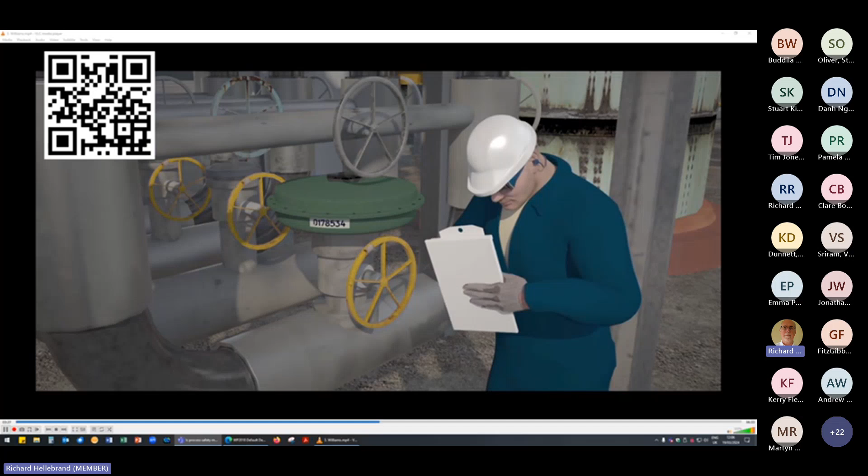On June 13, 2013, during a daily meeting with operations and maintenance personnel, the Williams plant manager noticed that the water flow rate through the operating reboiler had dropped gradually over the past day. The operations supervisor informed the group he would try to identify the problem, and he went into the plant to evaluate the water flow rates.

The operations supervisor informed several personnel that fouling within the operating reboiler could be the problem, and they might need to switch the reboilers. He attempted to meet with his manager so they could get the necessary maintenance and operations personnel involved to perform the work, but his manager was not available. The operations supervisor returned to the field.

The CSB determined that at 8:33 a.m., the operations supervisor likely opened the water valves on the standby reboiler. Hot water began flowing inside. The valves blocking the reboiler from its protective pressure relief valve remained closed.

But unknown to the operations supervisor, the standby reboiler contained flammable liquid propane that had accumulated during the 16 months the reboiler was out of service. The hot water quickly heated the liquid propane confined inside the reboiler, and pressure dangerously increased. Just 3 minutes later, the reboiler violently ruptured.

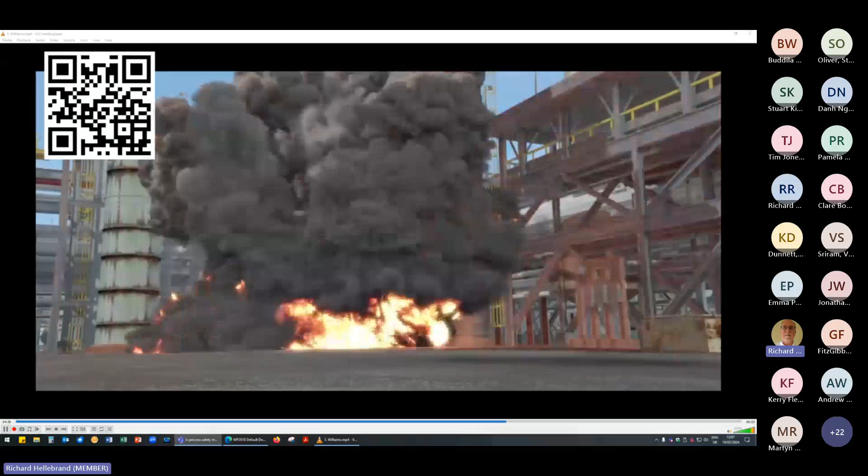Propane exploded from the reboiler and ignited, creating a massive fireball. The explosion killed the operations supervisor and an operator working nearby. 167 Williams employees and contractors reported being injured.

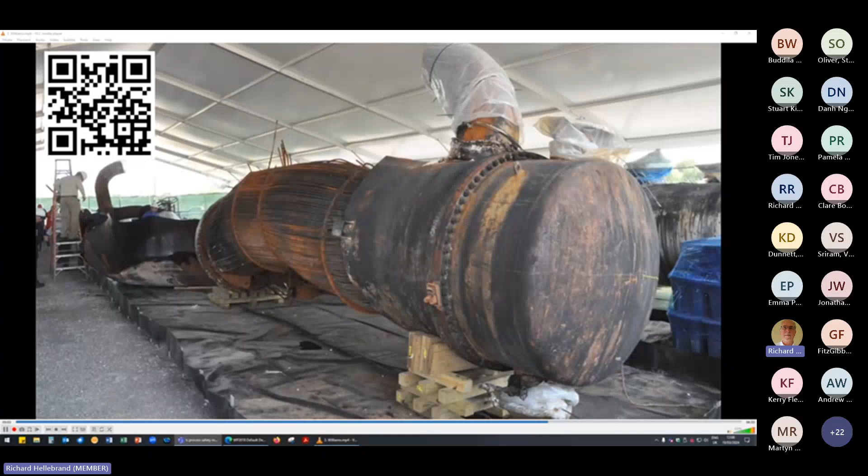During its investigation, the CSB found that prior to the explosion, the standby reboiler had been out of service for over a year, isolated from the process by closed block valves. But during this 16-month period, liquid propane unintentionally entered the shell of the reboiler, perhaps through a mistakenly opened valve or a leaking block valve.

The CSB determined that when the operations supervisor opened the hot water valves to the standby reboiler, the propane liquid trapped inside was heated and expanded in volume to completely fill the reboiler shell. This caused pressure to dramatically increase until the reboiler ruptured.

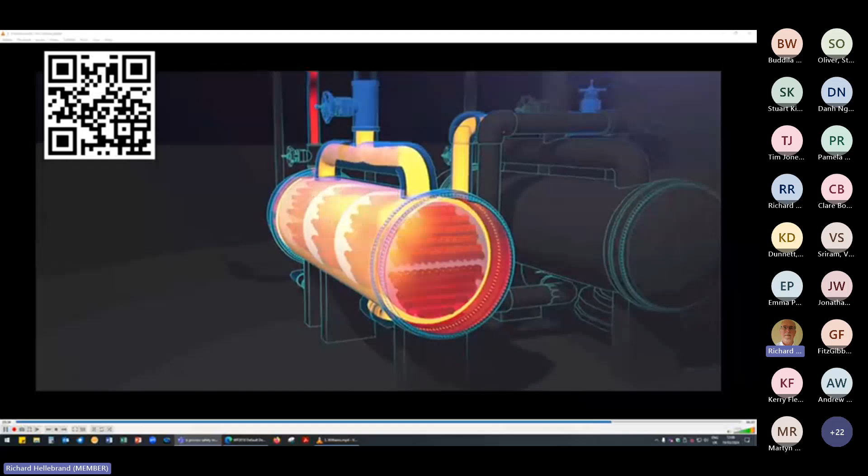When identifying overpressure protection requirements for heat exchangers, engineers should evaluate the scenario that caused the Williams explosion: the hot side of the heat exchanger was operated while the cold side was blocked in. In this scenario, just having a pressure relief valve available could have prevented the explosion.

The CSB discovered that in the 12 years leading to the incident, a series of process safety management program deficiencies caused the reboiler to be unprotected from overpressure. When Williams installed the process block valves on the reboilers in 2001, they performed a management of change review to identify how this action affected the safety of the process. The CSB found, however, that Williams did not identify that the new valves could isolate the reboilers from their protective pressure relief valve.

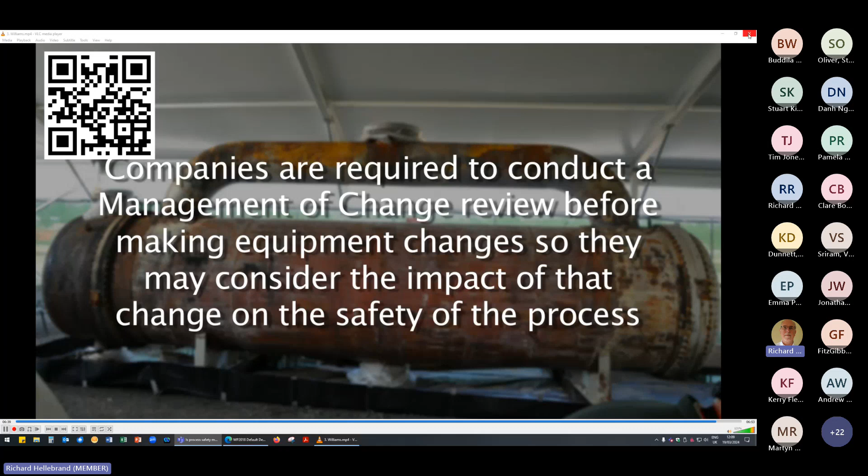Companies are required to conduct a management of change review before making equipment changes, so they may consider the impact of that change on the safety of the process. But the CSB discovered that Williams conducted the management of change review after the process was already operating with the new valves. We concluded that Williams conducted...

I've cut the video short because there's not a lot else on it.

So that's three short case studies we popped up, but they have some common themes: ignored warnings from the shop floor about things that had gone wrong, ignored knowledge of outside events and incidents, poor management of change, poor technical risk assessment, and no human factors considerations. All of those things contributed to those disasters, and unfortunately you get them every year. I could have picked three other videos, more recent ones. They continue to operate.

The European Process Safety Centre surveys its member companies every year, and in 2022 we had 37 companies respond, covering 1.7 billion working hours and 1,600 incidents. When we did the analysis, more than 50% of those incidents were due to operations. So this is why it isn't good enough to just do the technical design and the HAZOPs and everything else, but also to really look at those operational tasks, because very often they're not in those HAZOPs. They're done afterwards, when the project engineers are leaving the plant, maybe.

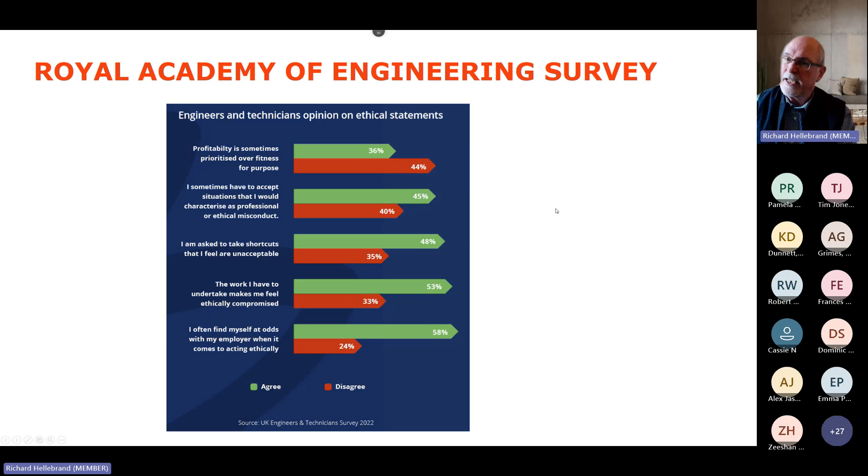If you're from the IChemE, members must hold paramount the health and safety of others, draw attention to hazards, and prevent avoidable danger. And the Energy Institute, because that's the other one we're talking today, members will at all times take care to ensure their work and the products of their work constitute no avoidable danger of death or injury or ill health.

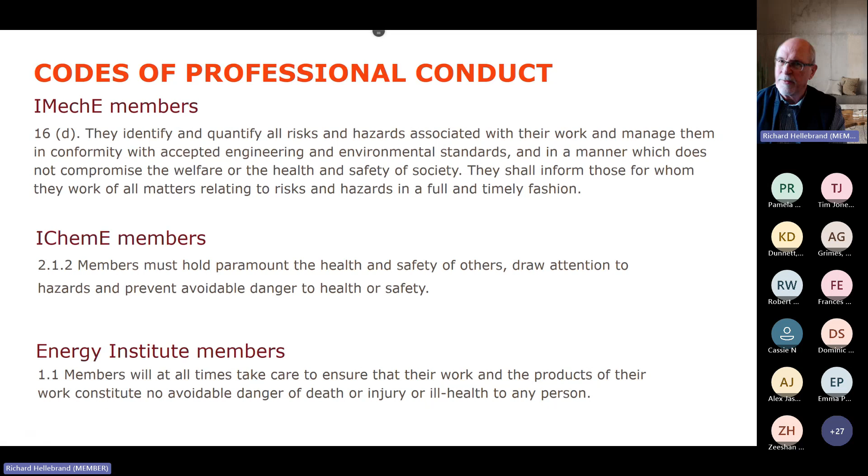So we all know what we're supposed to do. Actually doing it isn't so easy. So I just jotted down a few thoughts. I'm sure we could go on for pages about this. It's not an easy thing to do, and it depends upon the culture of your company.

On the occupational safety side, what if you see something wrong - the guard's loose, missing, there's leaks? The normal thing is you tell the local supervisor, or the team leader or manager, but always put it in writing because people very often forget things. Should we say that? 'Oh, so-and-so, I told them about it, he did nothing about it.' We'll put it in an email. It's much harder to ignore it.

Don't do it in a horrible manner, but you've spotted something, you need to say it, because if that guard is missing or loose and someone goes along the following day and their arm gets chopped off, well, how do you feel about that?

In terms of activity, so you see contractors or your own people working at height, they're in the line of fire, they're lifting badly, or just uncontrolled work - you have to stop the work now and ask the people to consider if there's a safer way. It's very hard to do. You just build it up with experience, but it's something you have to have in your armory.

Even when they rectify it, still talk to a supervisor and follow up with an email, because they might just wear the PPE while you're there and then take it off again when you walk away. And then on the more technical level, we've all done designs, process hazard analysis, HAZOPs, management of change, FMEAs, loads of other types of risk assessments for all sorts of reasons.

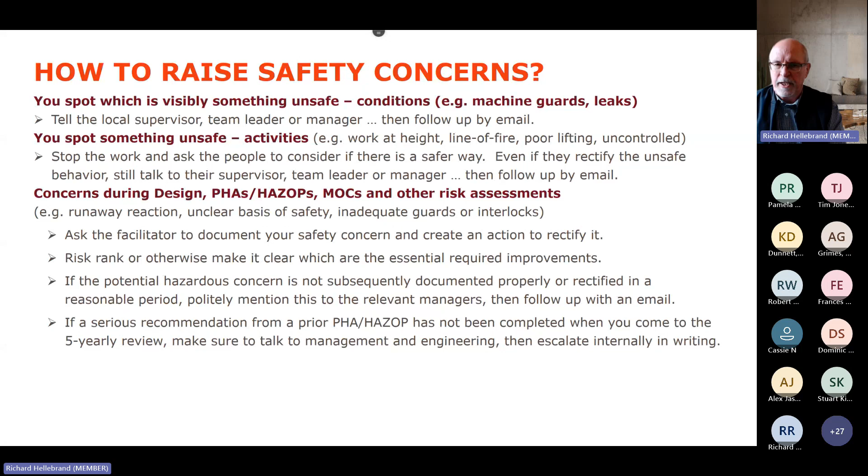I've come across this recently, 5-yearly reviews for Seveso sites, finding that actions weren't completed from the previous 5-year review and they're still going to review them again. What's going on there? You need to escalate those sorts of things, but without risk ranking it's very hard because there could be very minor things.

Of course, whistleblowing is a possibility, but your career might be cut short by that, or at least the career with your current employer might be. But if you're that worried about it, the HSE have got a web page and you can do whistleblowing in confidence.

The other thing is you could just change employer, and I've talked to a lot of people who've done it, they've left companies they don't think are very safe. As a generic thing, that's fine maybe, but if you know there's something seriously wrong and you just leave the company, well again, are you putting other people in danger? There's a brother's keeper principle here, I think.

I don't think there's an easy answer, and the more junior you are, it's something you have to go through and get mentored on maybe, and get more confident to be able to stop anything. But the general principle I was always taught is you can't, if you know about something that's unsafe, you can't walk past it. You have to do something about it.

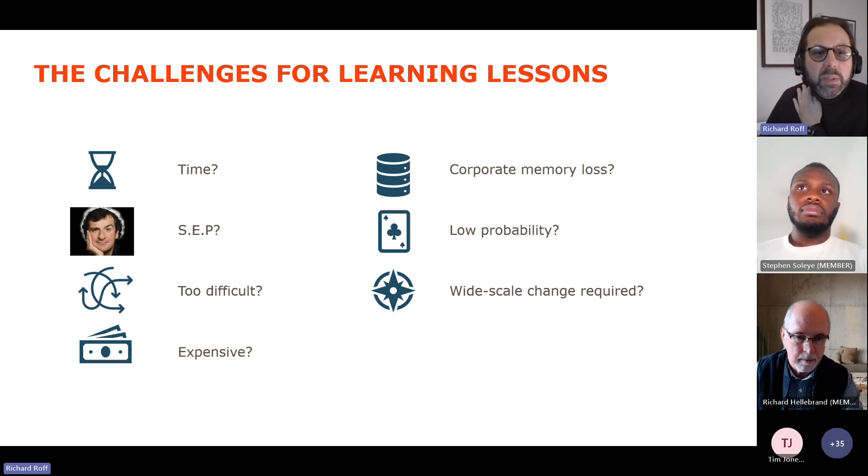So I would say make fewer changes and make them well is a good piece of advice that I often give to leaders. So if I think about a professional engineering approach, we can know everything. You can look it up on the internet, and then the challenge is sorting the wheat from the chaff, but you can kind of know everything.

You don't have to remember stuff, perhaps like we used to, but on a personal level, be curious, read around your subject, look at other sectors, look for the general message in the specific incident, and that applies in your own sector and your own location, because it may well be that an incident with a heat exchanger is not really about heat exchangers. It might well be about operational control, and that might also apply to fired heaters, boilers, refrigeration plant, and so on.

Equally, materials handling equipment. Do find an opportunity to pass on your knowledge, and if where you work there aren't obvious places to pass on knowledge and tell stories, then suggest it. In fact, why not take the initiative, set one up?

Everyone can bring their sandwiches, and over lunchtime a lot can be discussed and a lot of knowledge can pass back and forth. It's particularly the case once you get some experience under your belt, take the opportunity to pass on knowledge. And when we talk about leaders and managers, if you manage and lead in an organization, make sure that passage of knowledge is valued by what you do and what you say.